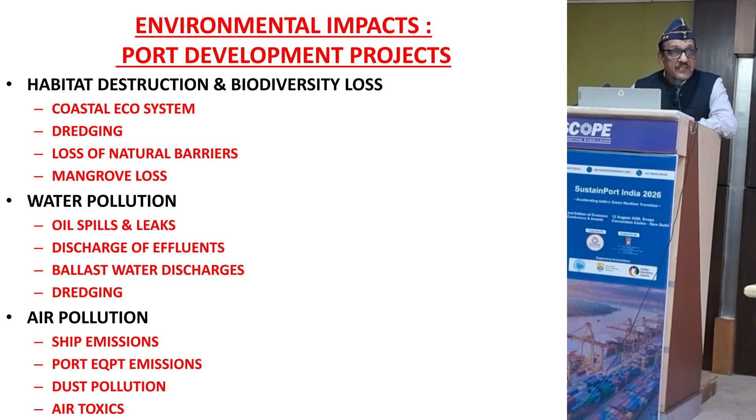Now, this technology today is coming very useful for the ports also, for port projects. Most of the authors have already covered what the pollutions are. We are mostly talking about air pollution, but there is also noise pollution and additional pollutions. I will concentrate my presentation only on air pollution, for which we have got the solution.

Coming to the concept of this Bunkerman technology, gentlemen, pollution is increasing continuously in all big cities like Delhi, Bombay, Calcutta. The temperature is increasing; the global 1.5 degree limit has already been crossed. We are going to cross very soon even 2 degrees centigrade.

And as Madam said this morning, DG TERI said that whatever we expected - that global temperature will rise - it is rising much faster than that. So this is a fact. I will show you some of the data.

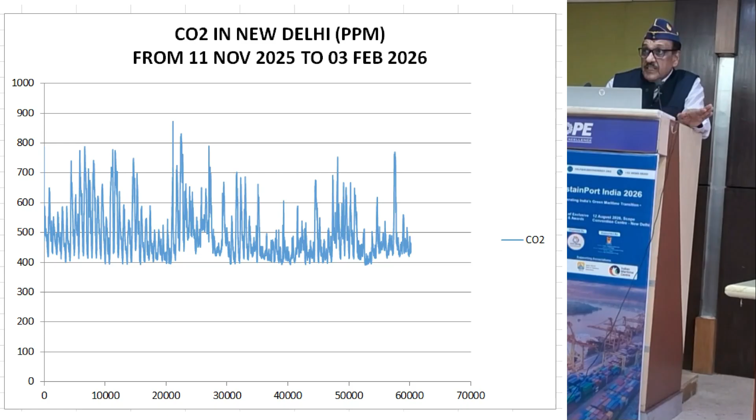Gentlemen, this is Delhi. World average CO2 was 425 till last year; this year it has been reported at 430 ppm world average. But in Delhi it is crossing 600, 700, 800, and even in some areas, near AIIMS Hospital and Safdarjung Hospital, we recorded last year that it crossed 1000 ppm CO2 content in the environment outside, which is causing a great problem.

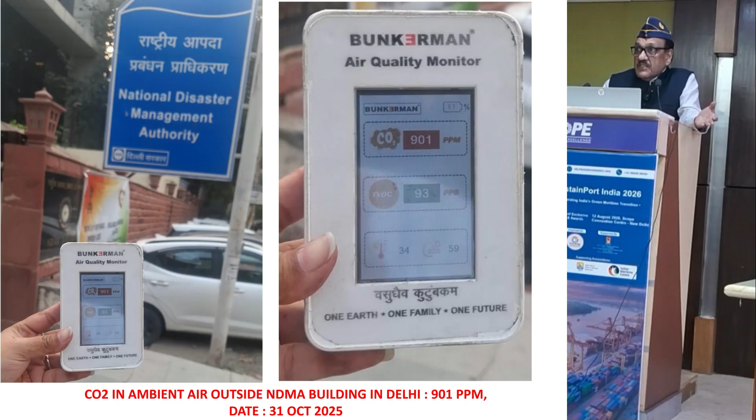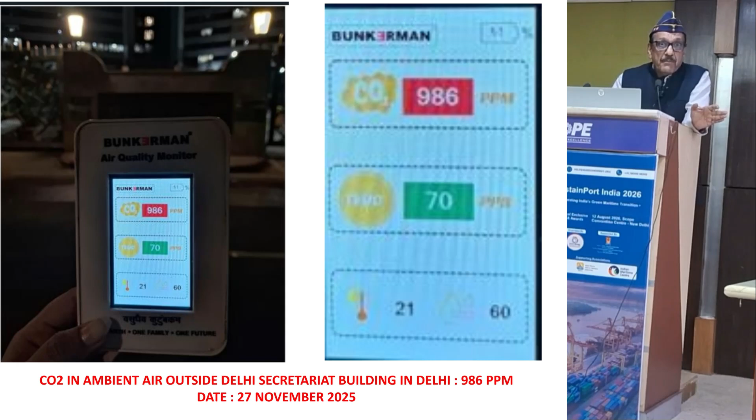This reading was taken in front of AIIMS Hospital, Safdarjung Hospital: 1052 ppm, noted in October 2025. Next to our National Disaster Management Authority, more than 900 ppm was recorded. In the Delhi Secretariat, 731 ppm, and at night it crossed 986. Now, gentlemen, the upper limit given for all air-conditioned buildings is that it should not cross 800 or 1000 ppm. I will come to why our air-conditioned buildings are failing today to ensure indoor air quality and temperature.

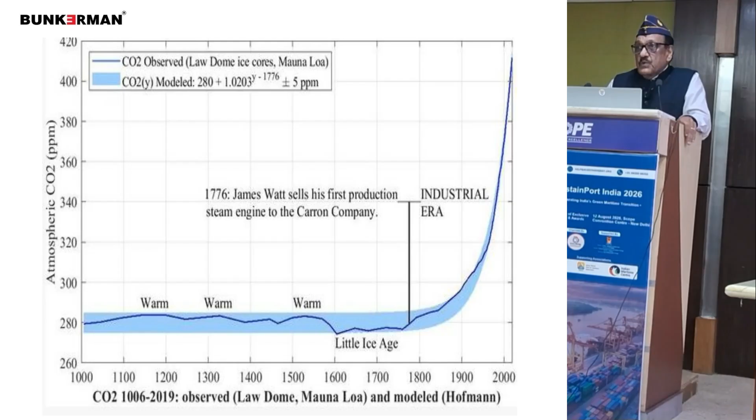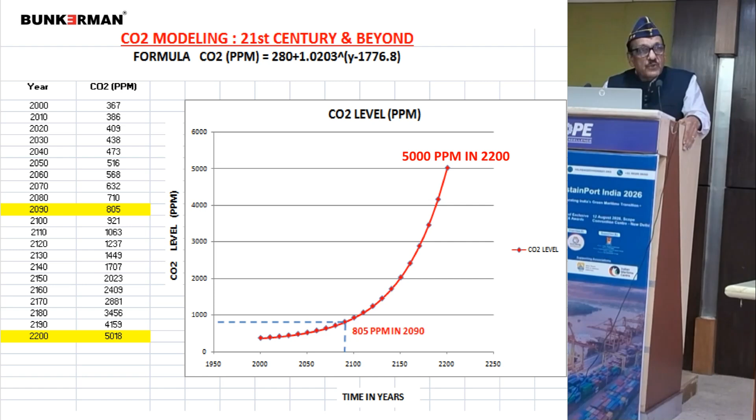Now this is the equation. If we extrapolate this, it means that if we don't do anything to arrest this rising trend of CO2, then by year 2090 this will cross the safe limit of 800 ppm, and by 2200 it will cross a very dangerous level of 5000 ppm.

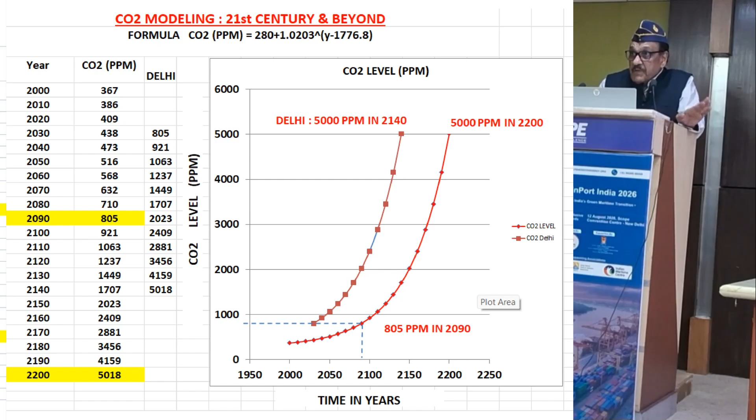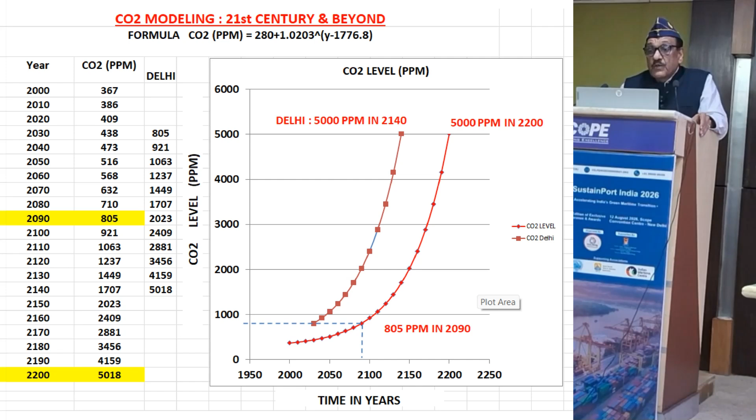But in Delhi, this is the graph. By this trend, 800 ppm limit should have come in Delhi by 2090. But in Delhi, it is already crossing 1000 ppm. So the year 2090 has already arrived in Delhi in 2026, in other words. And therefore, by 2140, it will cross a figure of 5000 ppm, gentlemen.

And at 5000 ppm, what will happen? No human being will be able to survive on this planet. It means only the next 2 generations - we will live comfortably, probably our next generation will also live - but the generation after that, God is only responsible for whether they will be able to survive on this earth or not. And that is why the whole world is worried now.

This was the dream of Dr. APJ Abdul Kalam, that let us make the planet livable. Otherwise, this planet is no more livable if we don't arrest this rising trend of CO2.

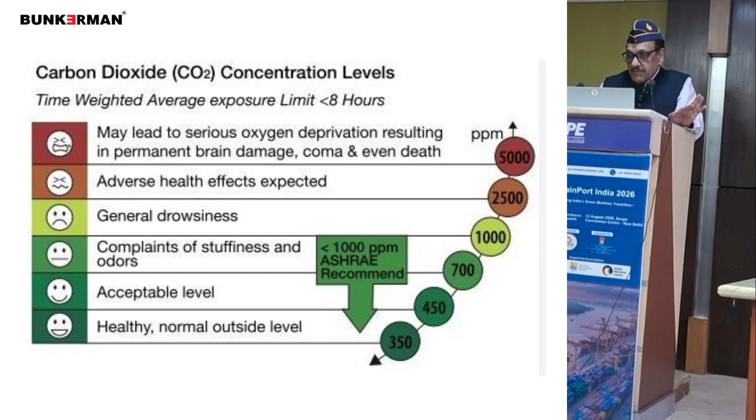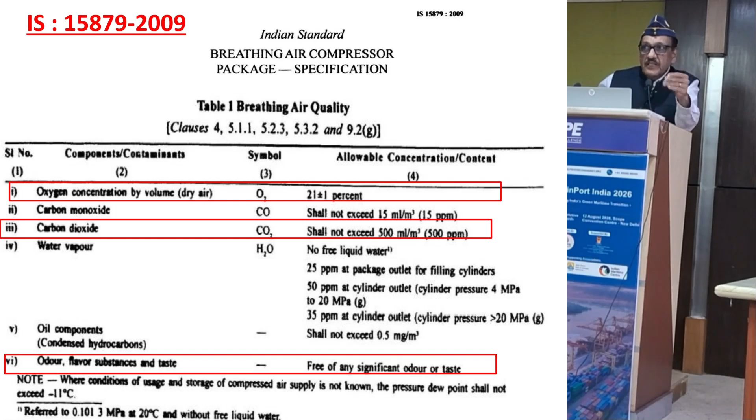There is an Indian standard published by us, IS 15879, published in 2009 by Bureau of Indian Standards. This says that safe limit of carbon dioxide in air for breathing should not exceed 500 parts per million. But today, even in this hall, when we came in the morning, outside CO2 content was 600. Now it has already crossed 900 ppm, and there is hardly any occupancy.

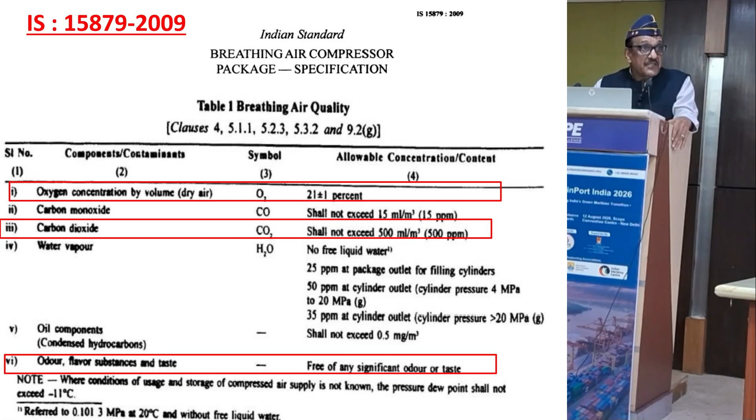I have got the records in India. The CO2 level in all indoor halls like this rises beyond 1000, which is specified by ASHRAE. I will show you some of the figures.

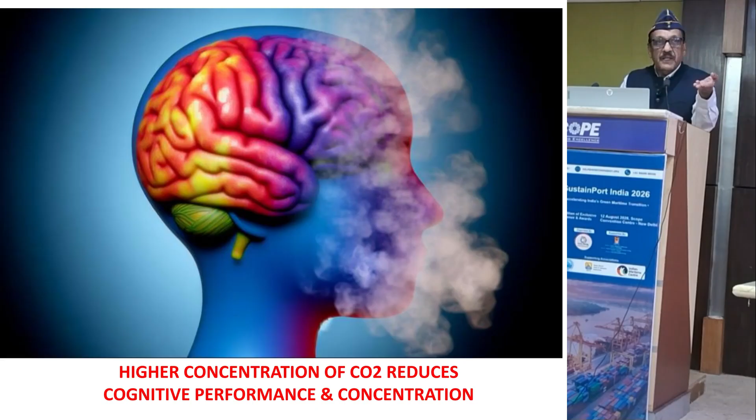Another effect of this rising CO2: if CO2 level crosses above 900, gentlemen, there is 15% reduction in our cognitive capacity. You must be feeling sleepy, you must be yawning in the afternoon because the CO2 level has risen from 600 ppm to about 900 or 1000 ppm. And if this level rises beyond 1400 ppm, these are studies by Harvard University and other universities, your cognitive skill gets reduced by more than 50%.

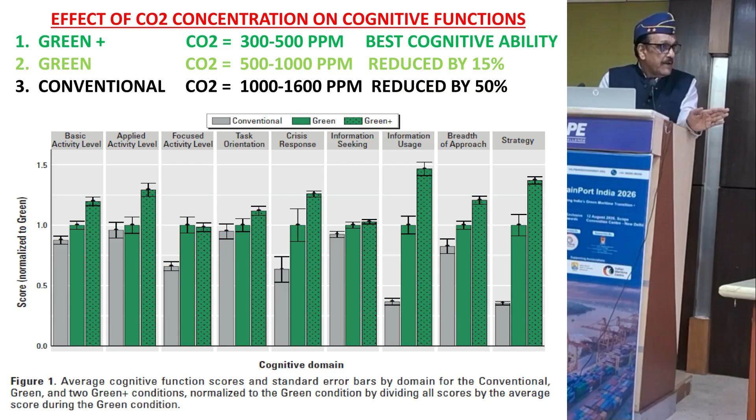So it means all of our officers working in air-conditioned offices where CO2 level exceeds 1500 ppm are using only 50% of our mental faculty. All our students studying in schools where ventilation is not proper are working with only 50% cognitive skill capacity.

This is a fact. These are the records from one of the schools. This is a very good university in NCR, where in the classroom the CO2 level was found to be more than 2300 ppm. And mind it, this is a green building.

In India, we certify buildings as green buildings with the map when the planning is done, and then we forget about ventilation. This building has a beautiful campus, all green building, green area, lot of greenery, lots of trees planted there. But what foolishness we have done - when classrooms were designed, they had no proper ventilation with ventilators, doors and windows.

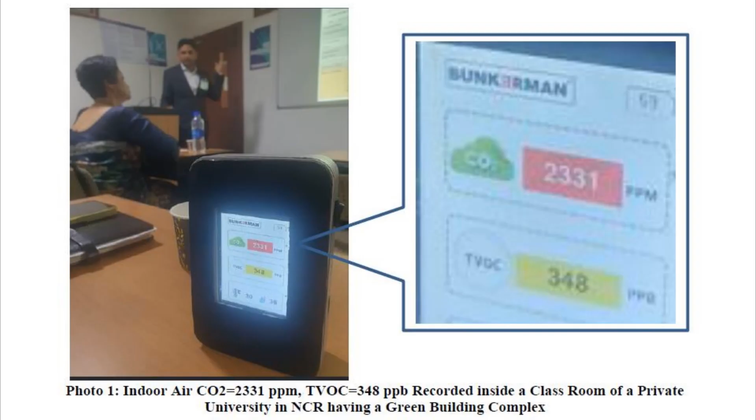Now students complain that it feels hot, so they closed all ventilation and put 2 air conditioners inside - no ventilation. With the result, gentlemen, CO2 content goes to 2300 ppm. Now you can imagine, our students are studying, sitting inside a gas chamber basically. And that's why their health is being spoiled, that's why their cognitive skills are getting affected. This is a bitter truth.

See another level - this is a 5-star hotel where the Bharat Summit, Rising Bharat Summit was held. Our ministers, Prime Minister, Home Minister were addressing this and talking on this very topic. And the CO2 content rose to 1300, 1400. In fact, by the time they finished, it rose to more than 1800 ppm.

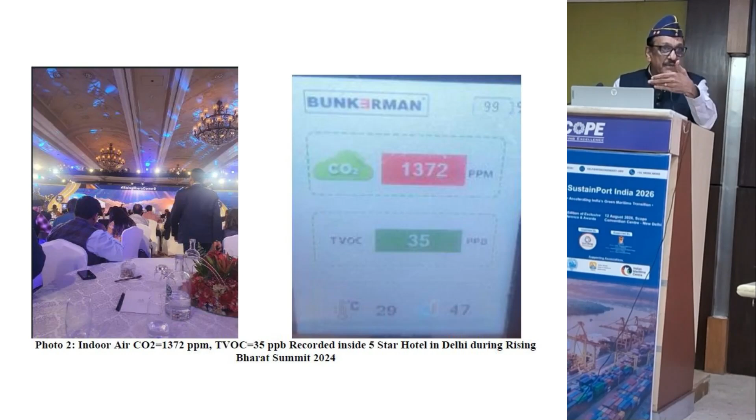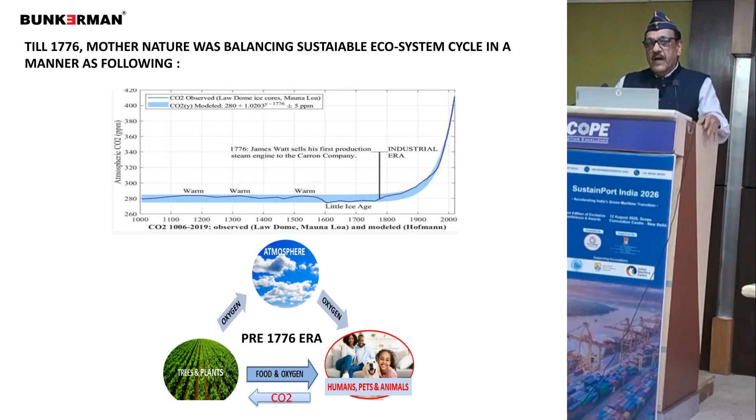So what was happening, gentlemen? Earlier, on the left, there was a sustainable cycle, this triangle which you see. Prior to the industrial era, prior to year 1776, whatever CO2 was being generated on the earth by any activity, our natural system of trees and plants were able to absorb it. And in return, they were giving us oxygen and food. So this was a sustainable cycle existing on the earth for thousands and thousands of years.

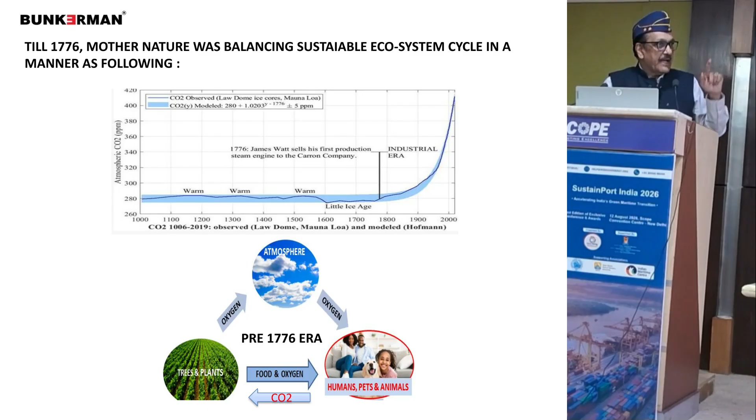But what happened after that? We constructed industries, we increased the number of vehicles and traffic, we went for air conditioning. Everywhere now there is air conditioning - in our house, in your office, in your vehicle, in the car, in the bus stand, everywhere. Because of this, we generated so much carbon emission that this sustainable triangle on top failed. And on top of that, we started cutting trees - deforestation started. So this cycle got disturbed.

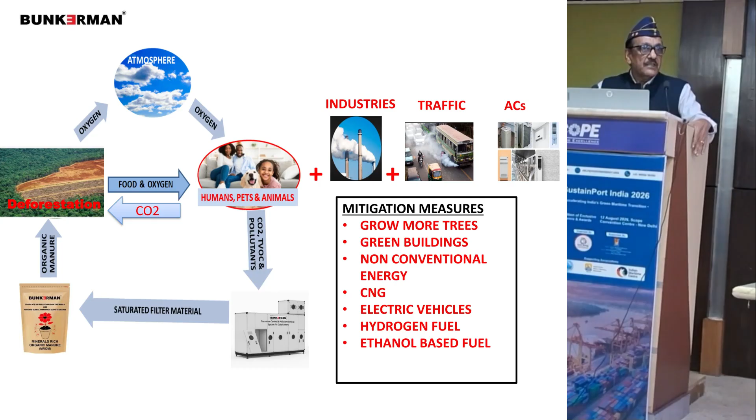Government is making all these efforts - grow more trees, green buildings, non-conventional energy, CNG, electric vehicles, hydrogen fuel, ethanol, methanol, all the things you have been hearing since morning. Everybody is making a dedicated effort to reduce emission. But why is this rising graph not reducing?

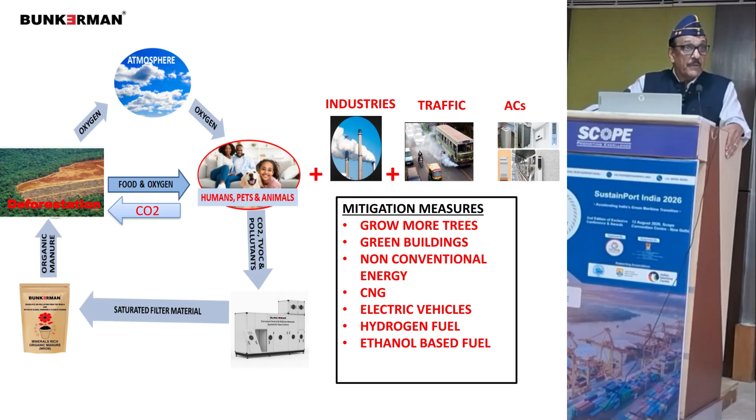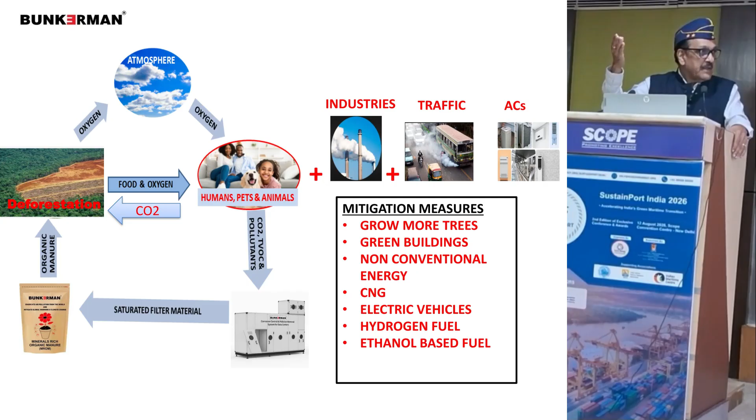We are claiming we fixed a target by 2070 to become net zero. Now we are saying by 2047 we become net zero. Some people are even talking of 2030. So if we will become net zero by 2030 or 2047, why is this graph still rising? Why is global warming not stopping? Why is temperature still rising? There is somewhere a mismatch.

The situation has come to this extent that we have created so much pollution, so much carbon in the existing air, that unless we capture it directly, the solution is not going to be there. So this technology of direct air capture or direct carbon capture has to be adopted by compulsion in India if you want to survive on this planet.

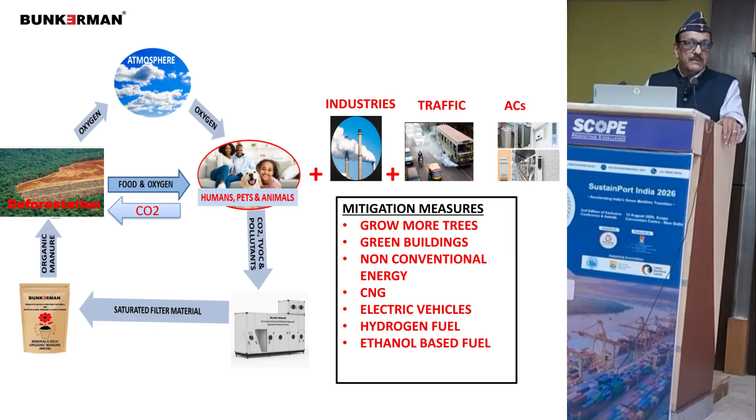So what this technology does, gentlemen, is we have invented a system in which we capture carbon dioxide, carbon monoxide, sulfur dioxide, all types of pollutant gases from the atmosphere, and we don't leave it back to the atmosphere again. These are captured into our filters called Bunkerman filters.

The filters last for 1 year, 12 months. They keep absorbing all these gases. After 1 year, we replace the old filters with new filters, and this new filter material gets enriched by this pollution. Carbon dioxide is converted into a stable compound, carbonates, in our filters.

Sulfur dioxide is converted to sulfates. Nitrogen dioxide is converted into nitrates. And all these things, carbonates, sulfates, nitrates, are nutrients for our trees and plants.

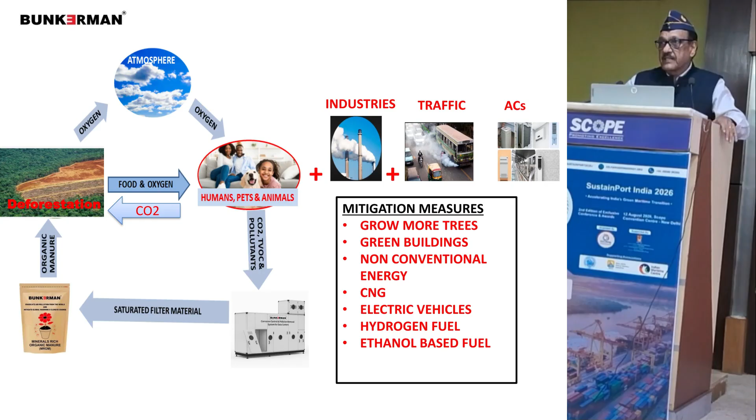So from this used, saturated filter material, we make mineral-rich organic manure in our plant, which is about 100 kilometers from here in my native village. This manure is then issued to the farmers, and farmers use it in farming.

So, in a way, pollution is moving from air to soil, and it is providing the nutritional value to trees and plants. There will be more production of food, more oxygen will be produced, and therefore the sustainable cycle of the triangle which existed earlier will be restored by this.

This is what is our aim. It is a very big aim, gentlemen. You may not believe it, but we have proved it.

This has been successful. This technology of direct carbon capture, gentlemen, I have been using in India for the past 25 years, but only in top secret projects, underground nuclear bunkers. This is, in fact, still top secret. There are about 45 systems in these nuclear bunkers which are used. Out of them, there is one system, the indoor air quality management system.

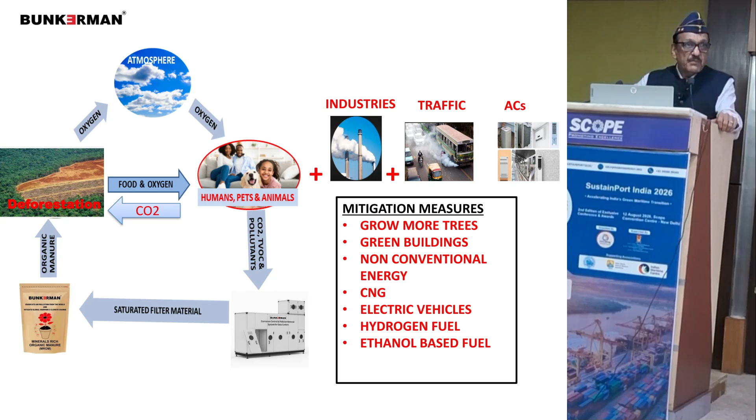After suffering in Corona, I decided that this technology, developed by me in India and totally indigenous, why not use it for my common public, for civil use? So with great difficulty, gentlemen, I have taken permission from the government to use this technology in civil use.

This is the organic manure made out of pollution existing in the air. Now, this is the concept you have to understand, gentlemen. Everybody talks about pollution coming from industry or from the exhaust of a vehicle. Nobody believes that man itself is a pollution creating machine.

Gentlemen, in one inhalation-exhalation, I multiply the contents of CO2 in the atmosphere by a factor of 146. This is a fact. I can experiment it and show it to you today if you have got time.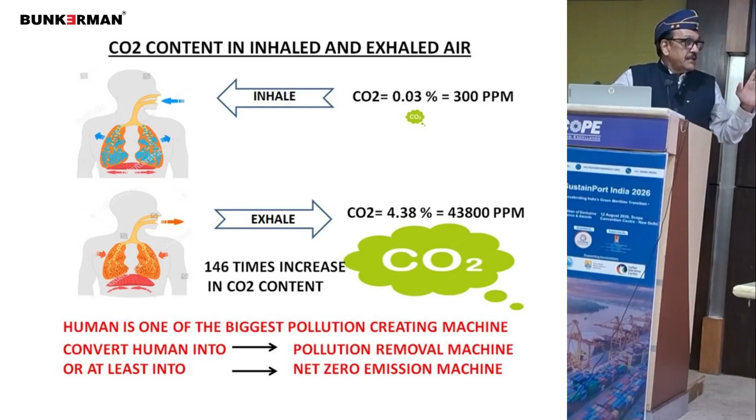But a tree - how much does one tree absorb in a year? A grown up tree of 10 to 15 years of age absorbs only 20 to 25 kg of carbon dioxide in a year. So each one of us needs about 17 trees per person.

Other livestock, animals, birds, they also breathe. Even a lizard hidden somewhere here is consuming oxygen and giving out CO2 in this environment. So 15% is the CO2 emission by respiration from livestock.

So in my technology, in my solution, I am thinking of this first, because this is what is affecting your immediate health. Whatever you are exhaling out, I am inhaling. This is happening almost in our villages, in our homes, in our offices also.

So gentlemen, we need 17 trees. Now coming to trees, see the interesting thing - we need 17 trees in India to absorb the CO2 which we are exhaling out by respiration. We need 20 trees for our livestock.

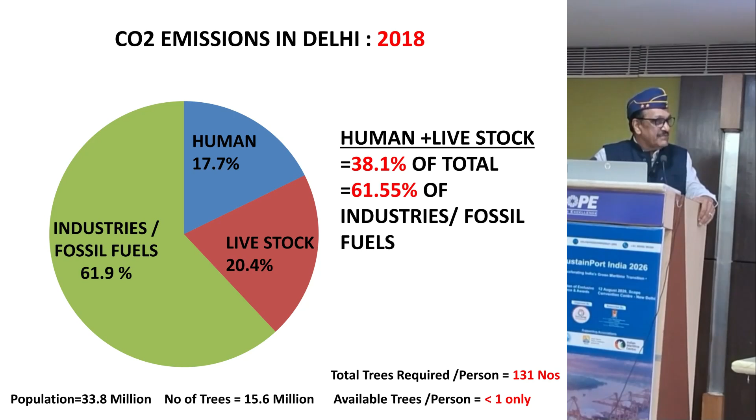So now you can imagine how much greenery you can develop in Delhi and reverse this climate change. No, this is the reason why Delhi's pollution problem is not coming down. And see the world scenario, gentlemen.

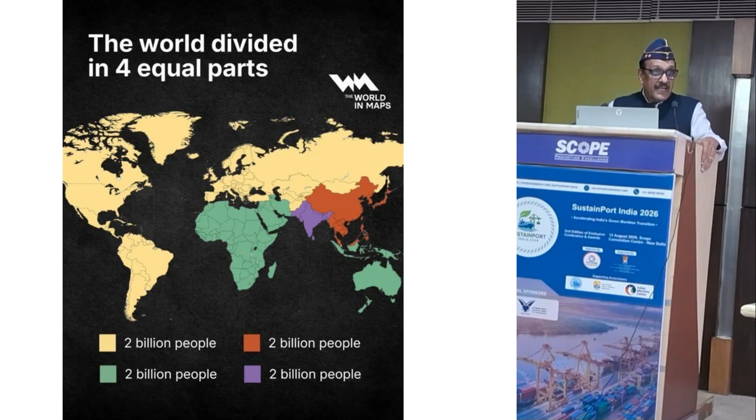And that is the reason why we say Delhi is the worst in the world in terms of pollution. Why is Delhi's status the worst in pollution? Delhi is like that because most of the concentration of population is in this region of the world.

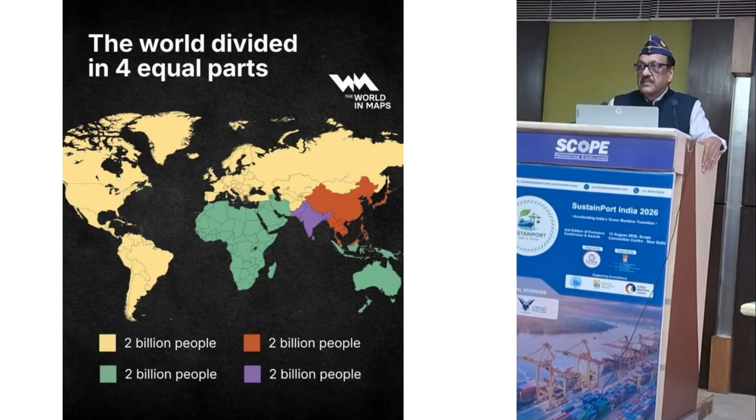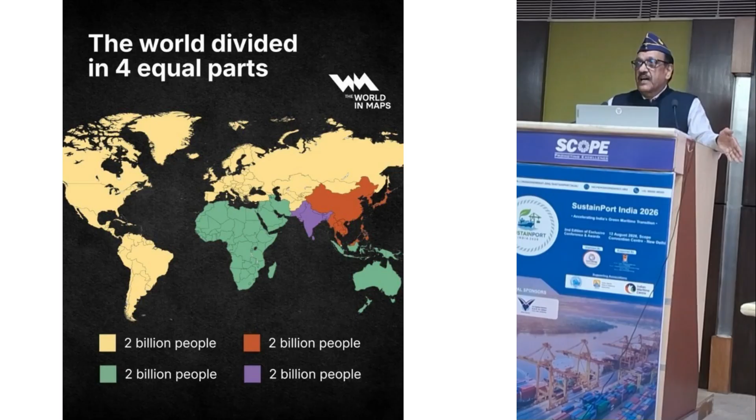जहाँ ज़्यादा पॉपुलेशन है, वहाँ ट्री कवर पहले से ही बहुत कम है, ऑलमोस्ट ज़ीरो। तो क्या ट्री प्लांटेशन इसमें मदद कर पाएगा? जेंटलमैन, मैं भी ज़्यादा पेड़ लगाने के पक्ष में हूँ - ऑक्सीजन पेड़ों से ही मिलेगी, लेकिन इसकी एक कैलकुलेशन है, एक साइंटिफिक तरीका है, उसको फॉलो करना पड़ेगा। तो क्या अब आप समझ गए कि इंडिया में क्यों प्रॉब्लम है?

Now what is happening, gentlemen, in air conditioned buildings? In air conditioned buildings, there is a code which is followed, and this code is by ASHRAE, American Society of Heating, Refrigerating and Air-Conditioning Engineers. That ASHRAE standards have been made based on American conditions.

In America, outdoor CO2 content in air is still 300-350 ppm, जो इंडिया में 800-900 हो गया है। और इसीलिए जो बिल्डिंग डिजाइन करी है इंडिया में, आज भी हमारे डिजाइनर वही स्टैंडर्ड लेके फॉलो करते हैं। उन्होंने एक मिनिमम स्टैंडर्ड दिया है कि मिनिमम इतना वेंटिलेशन होना चाहिए, वो हम फॉलो करते हैं। विद रिज़ल्ट जेंटलमैन, ऑल आवर एयर कंडीशन बिल्डिंग्स आर फेलिंग टू मेंटेन द इंडोर एयर क्वालिटी एंड इवन टेम्परेचर।

आई हैव गॉट कंप्लेंट्स फ्रॉम मैनी बिल्डिंग्स इन नोएडा। उनका टेम्परेचर 29 डिग्री से नीचे नहीं आ रहा है। 29 डिग्री से नीचे लाते हैं टेम्परेचर तो CO2 लेवल बढ़ जाता है। गुड़गांव में एक अच्छी प्रेस्टिजियस बिल्डिंग ऑफ ए कंपनी विच इज प्लेटिनम सर्टिफाइड, ग्रीन सर्टिफाइड, उसमें CO2 लेवल हैज बीन फाउंड एक्सीडिंग 3000 ppm। People are vacating that building now, they are shifting to some other location. So this problem has already started.

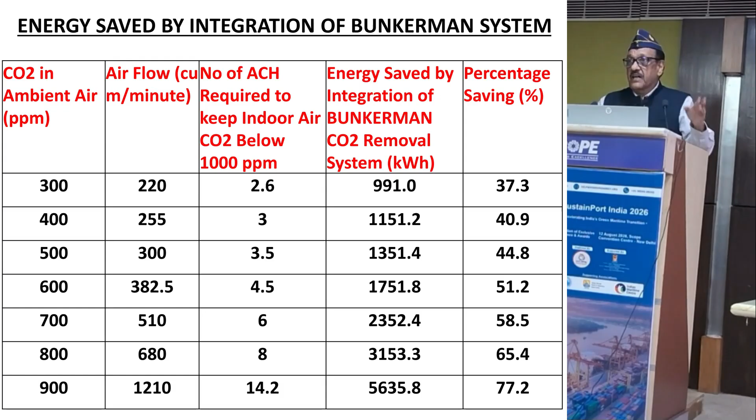और मजेदार बात क्या है, what these building owners are doing - जब इनको पता है कि ये फेल हो रहा है, what they are doing, they are increasing the capacity of air conditioning plant। जहाँ 200 टन का प्लांट है वो 300 टन का कर रहे हैं। इससे प्रॉब्लम और बढ़ेगी।

क्यों बढ़ेगी? क्योंकि इसमें एक एयर चेंज का सिस्टम है जेंटलमैन। आप समझिए, इस हॉल में आप बैठे हुए हैं, अब ये 1000 ppm हो जाएगा CO2। कोड कहता है 1000 से ऊपर नहीं होना चाहिए। तो क्या करते हैं, बाहर की हवा ऐड करते हैं, दिस इज कॉल्ड एयर चेंज पर आवर। और बाहर का टेम्परेचर इंडिया में अभी कितना है? 40-45 है आज के डेट में, 35-40।

अंदर हमको 20-22 चाहिए। तो ये सारी हवा बाहर की अंदर लाते हैं हम, जिसको ठंडा करना पड़ता है। गर्मियों में, सर्दियों में उल्टा हो रहा है। सर्दियों में बाहर का टेम्परेचर 5-10 डिग्री सेंटीग्रेड होता है, मुझे 22 डिग्री चाहिए अंदर, वो हीटिंग करना पड़ता है। तो ये जो एनर्जी वेस्ट होती है, इसको किस वजह से कर रहे हैं?

क्यों कि CO2 का कंटेंट 1000 ppm से ना जाए। एंड व्हाट इज 1000 ppm इज 0.1%। और हवा में बेसिकली 3 गैसेज हैं। एक है नाइट्रोजन जो न्यूट्रल गैस है जो 78-79% है। बाकी है ऑक्सीजन जो अच्छी गैस है, 21% ऑलरेडी है। इसको 19 से 18% आने में टाइम लगता है, 10-12 घंटे लगते हैं कम से कम।

लेकिन CO2 बहुत जल्दी बढ़ जाता है। तो इस 0.1% CO2 से घबरा के हम जो अच्छी एयर हमने ठंडी की है, इसको हम बाहर फेंकते हैं और बाहर की गर्म हवा को अंदर लेते हैं। दिस इज कॉल्ड एयर चेंज पर आवर इन HVAC डिजाइन। दुनिया में ऐसे ही सब AC डिजाइन हो रहे हैं।

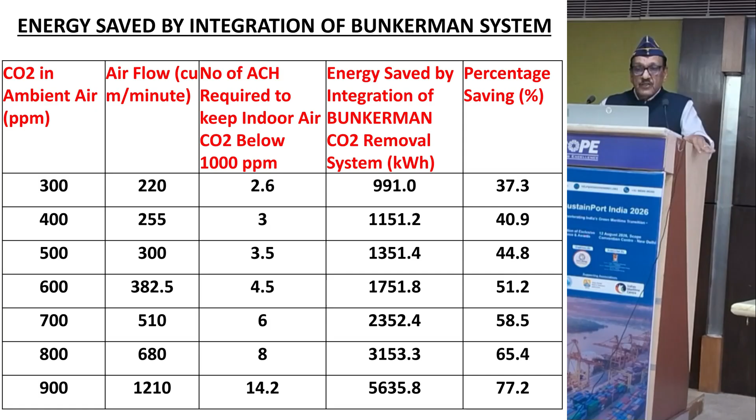तो दिस विल क्रिएट फर्दर प्रॉब्लम। सो माई कंक्लूजन इज दैट मोस्ट ऑफ दीज एयर कंडीशन बिल्डिंग्स, जितने भी 5 स्टार होटल हैं और जितने मल्टी स्पेशलिटी हॉस्पिटल्स हैं इन दिल्ली एंड NCR, आई हैव मेजर्ड इट। वहाँ जाके CO2 कंटेंट और यहाँ पर, यहाँ से 100 ppm ज़्यादा पाया जाता है वहाँ।

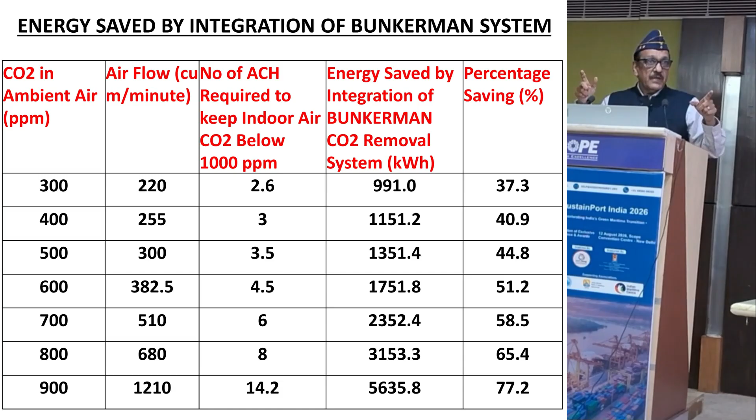सारे 5 स्टार होटल, ऑल मल्टी स्पेशलिटी हॉस्पिटल, वो पॉल्यूशंस को पंप आउट कर रहे हैं एनवायरनमेंट में। ये कंडीशन है हॉस्पिटल्स की। कुछ हमारे पास आए कि साहब हमारा ऑन्कोलॉजी डिपार्टमेंट है नीचे, जो रेडिएशन निकलता है उसको क्लीन करने का कोई सिस्टम नहीं है इंडिया में, उसको एयर चेंज से पंप आउट कर देते हैं बाहर। 10, 12, 15, 20 एयर चेंजेस यूज होते हैं हॉस्पिटल्स में, 1 घंटे में 20 बार, और सारा पोल्यूशन बाहर जाता है।

अब आप इमेजिन कीजिए, इनसे पूछते हैं क्या करते हैं, तो कहते हैं साहब हम अपनी बिल्डिंग के टॉप पे 10 फीट ऊपर छोड़ देते हैं। हॉस्पिटल 4-5 स्टोरी का है, लेकिन इसके पीछे बैकग्राउंड में कितनी मल्टी स्टोरी बिल्डिंग्स हैं, 15, 20, 25 स्टोरी।

पुराने लोग सोचेंगे, नोएडा बसाया गया था किस लिए? दिल्ली में पॉपुलेशन का लोड कम हो। गुड़गांव बसाया गया कि दिल्ली में पॉपुलेशन का लोड कम हो। लेकिन अब नोएडा, गुड़गांव, ग्रेटर नोएडा सब सैचुरेट हो चुके हैं, वहाँ पर भी मल्टी स्टोरी बिल्डिंग आ गई है।

अब दोबारा एक ट्रेंड शुरू हुआ है दिल्ली में मल्टी स्टोरी बढ़ने का, और जेंटलमैन मल्टी स्टोरी बढ़ेंगी तो कंसंट्रेशन पॉपुलेशन होगा। इससे रिलेटेड सारी एक्टिविटी CO2 एमिशन की हैं, क्योंकि इनकी गाड़ियाँ भी होंगी, इनके चूल्हे भी जलेंगे, सारा काम CO2 एमिशन ही कर रहे हैं।

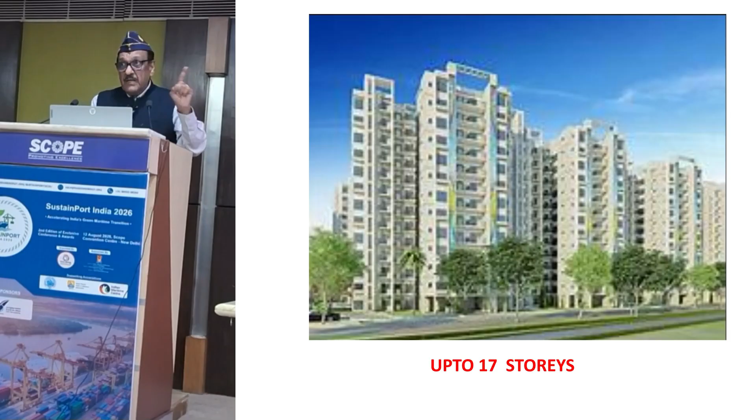तो गवर्नमेंट कोशिश बहुत कर रही है, लेकिन जितनी आप कोशिश कर रहे हैं नेट जीरो होने की, वो नलीफाई हो रही है इससे, क्योंकि जो इफेक्ट यूज कर रहे हैं उनका इफेक्ट पड़ता है 5%, 10%, लेकिन पॉपुलेशन बढ़ जाती है 25%, 30%। दिस इज द रीजन, बिना डायरेक्ट कार्बन कैप्चर के प्रॉब्लम सोल्व नहीं होने वाली है, आई एम 100% श्योर।

This is my conclusion. I have recommended to the government that all 5-star hotels and multi-specialty hospitals are pumping out pollution into the outdoor environment.

जैसे स्प्लिट एयर कंडीशनर बाहर गर्मी छोड़ता है, अंदर की गर्मी आप बाहर छोड़ रहे हैं, उसी तरह अंदर का सारा पोल्यूशन बाहर छोड़ रहे हैं। This is a bitter fact, which is causing health hazard for the public. It may be sustainable business for hospitals and 5-star hotels, but it is a destruction model for public health.

And therefore, reduction in air change per hour by using Bunkerman technology of direct carbon capture at a negative cost reduces this problem. Gentlemen, direct carbon capture सब कंट्री यूज कर रही हैं, लेकिन इसकी इंटरनेशनल कॉस्ट मार्केट में अभी भी $300 से $600 पर टन है।

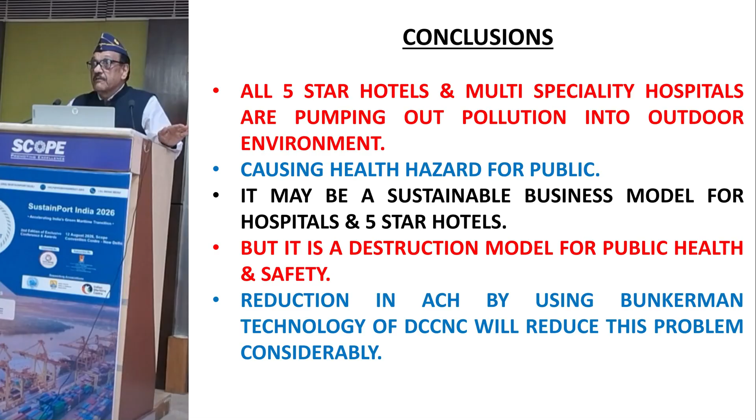You will be surprised with this Bunkerman technology, which is totally indigenous. We have not only brought this cost to zero, it is minus $160 पर टन। अभी दिखाऊंगा आपको इसके केसेस, ये टेक्नोलॉजी कमा के दे रही है आपको।

सक्सेसफुल केस स्टडीज। पहला ये सिस्टम हमने लगाया 2 साल पहले गुवाहाटी की रिफाइनरी में। उनके यहाँ एक डाटा सेंटर था जिसमें 9000 क्यूबिक मीटर ऑफ स्पेस था, 85 मीटर बाई 25 मीटर का। इस डाटा सेंटर में कोरोजन हो रहा था, इनका डाटा करप्ट हो रहा था।

जो इलेक्ट्रॉनिक पार्ट्स हैं वो कोरोड हो जाते हैं। क्यों? क्योंकि हवा में जनरली कार्बन डाइऑक्साइड, सॉक्स नॉक्स तो होते ही हैं, इनके अलावा बड़ी टॉक्सिक गैसेज होती हैं रिफाइनरीज में जो निकलती हैं, वो गैसेज अंदर जा रहे थे।

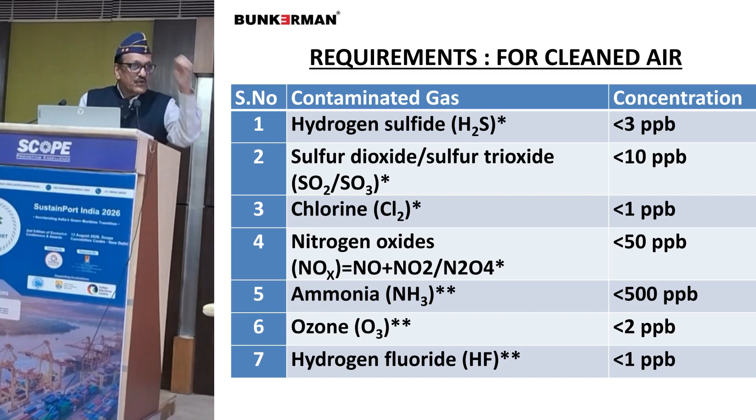ये 2 से 3 एयर चेंज पर आवर लेते थे। हर घंटे में इतनी बार बाहर का पोल्यूशन अंदर आ रहा था, अंदर का क्लीन कहाँ तक करोगे? नहीं हो सकता। हमने क्या किया, हमने इसमें सिस्टम लगाया अपना बंकरमैन टेक्नोलॉजी का।

ये सिस्टम लगाया इनके एसी प्लांट में, 4 मीटर बाई 1.5 मीटर का। और जब से हमने सिस्टम लगाया, दे आर यूजिंग ओनली 1 एयर चेंज इन 24 आवर्स। जहाँ 24 घंटे में 96 एयर चेंज ले रहे थे, वी हैव सेव्ड 95 एयर चेंजेस। तो 24 घंटे में 1 एयर चेंज लेते हैं।

वो भी किस लिए? क्योंकि ऑक्सीजन की जरूरत होती है। वो भी समझाऊंगा क्यों 1 एयर चेंज जरूरी है। जैसे इस हॉल में हमारी रिकमेंडेशन है कि जब मॉर्निंग में खोलते हैं तब बाहर 600-500 ppm है, तो अंदर का भी 500-600 कर लो।

नहीं तो जब खोलते हैं तब भी 1000-1200 मिलता है ज़्यादातर हॉल्स में। उसके बाद बंद कर दो। जो CO2 जनरेट हो रहा है उसको अंदर ही एब्जॉर्व करो नई सिस्टम के साथ। और आपको 10, 12, 15, 18 घंटे तक कोई जरूरत नहीं है फ्रेश हवा लेने की। उसके बाद अगले दिन फिर फ्रेश हवा ले लो। तो वी आर रिकमेंडिंग ओनली 1 फ्रेश एयर चेंज इन 24 आवर्स in building, and this is working fantastically now.

Practically it has been proved. I am using this technology for last many years practically on ground.

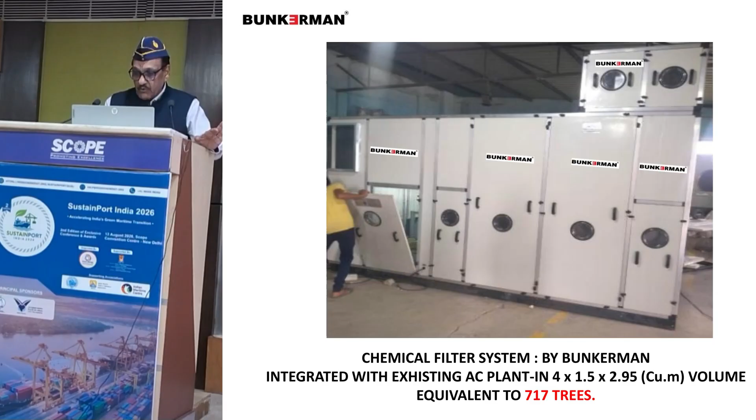ये सिस्टम है, एक ब्लोअर लगता है, ये बंकर, ये फिल्टर है हमारे छोटे से. दिस फिल्टर इज जस्ट बाय 1 फीट बाय 1 फीट साइज, 4 इंच थिक, और ये लाइक ए ब्रिक जुड़ जाते हैं. और ये फिल्टर जेंटलमैन, 12 महीने की हमारी गारंटी है रिफाइनरी में, क्योंकि पहला पायलट प्रोजेक्ट है.

हमने इसको 18 महीने चलाया. 18 महीने में फिल्टर सैचुरेट नहीं हुए हैं. लेकिन हम चाहते हैं कि ये 12 महीने में इनको वापस लें, क्योंकि हमने इसकी जो फिल्टर मटेरियल एनरिच हुआ है उसकी ऑर्गेनिक मैन्योर बनानी है. हमको इसको सस्टेनेबल साइकिल में डालना है. तो इसलिए हम 1 साल की गारंटी दे रहे हैं. 1 साल के बाद नए फिल्टर हम रिप्लेस कर देते हैं, पुराने फिल्टर वापस ले लेते हैं.

और इस बिल्डिंग में जेंटलमैन सबसे पहला इनका रिएक्शन ये था कि हमारी कोरोजन की प्रॉब्लम है, क्योंकि कोरोजन होता है इनका, G1 कंडीशन एक होती है, G1 कंडीशन मेंटेन करनी पड़ती है, वो नहीं हो रही थी इनकी. तो फर्स्ट रिएक्शन वाज, मैंने कहा भाई हमारी CO2 भी हम एब्जॉर्ब करते हैं. हाँ, CO2 की कोई प्रॉब्लम नहीं है हमें, इग्नोरेंस. लेकिन हमने CO2 जबरदस्ती डाला इसमें.

जब हमने डाला जेंटलमैन, CO2 अभी उनका 500-600 ppm से आगे नहीं जा रहा है. पीपल वर्किंग दे आर वेरी हैप्पी. उनकी फीडबैक है साहब पहले तो यहाँ दम घुटता था, अभी तो वी आर जन्नत में रह रहे हैं. हम रिफाइनरी के बाहर जाते हैं तो हमें पोल्यूशन महसूस होता है, क्योंकि बाहर की हवा में वो बदबू आती है, लेकिन अंदर रहें.

इसमें 3 चिलर थे, 80 टन कैपेसिटी के. 2 चलते थे, एक स्टैंड बाई रहता था. जब से हमने अपना सिस्टम लगाया एंड 1 एयर चेंज ले रहे हैं 24 घंटे में, सिर्फ 1 चिलर चल रहा है जेंटलमैन. तो 50% इनकी पावर सेविंग है.

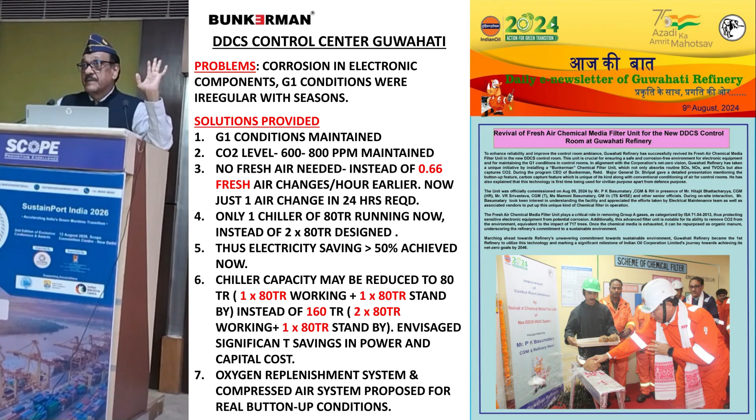और ये इसकी स्टैटिस्टिक, एजेंट में 128 फिल्टर्स आर देयर इन दिस स्मॉल सिस्टम. और ये 2 लाख रुपये पर मंथ की बिजली का बिल बचा रही है. और इतनी CO2 एब्जॉर्व कर रही है जो 700 पेड़ों के बराबर है. उसके अलावा जो बिजली की बचत हो रही है उसकी वजह से 7872 पेड़ों के बराबर ये कार्बन क्रेडिट क्लेम कर रहे हैं. टोटल कार्बन क्रेडिट्स दे आर क्लेमिंग इक्वलेंट टू 8597 ट्रीज इक्वलेंट.

ये जो आप समझ सकते हैं, कार्बन क्रेडिट में काम कर रहे हैं किस तरह से कैलकुलेट होती हैं. सो टोटल कार्बन एमिशन विच इज रिड्यूस्ड इज 215 टन. तो 215 कार्बन क्रेडिट पॉइंट्स दे आर अर्निंग विद दिस प्रोजेक्ट. विद द रिजल्ट, इन्होंने 3.87 लाख के कार्बन क्रेडिट अर्न कर लिए हैं एक साल में.

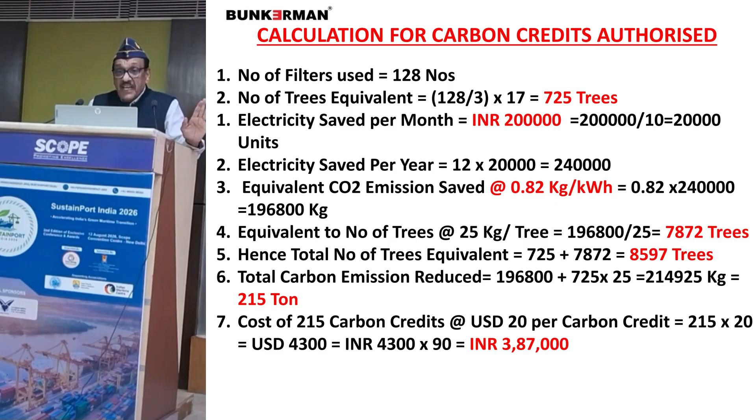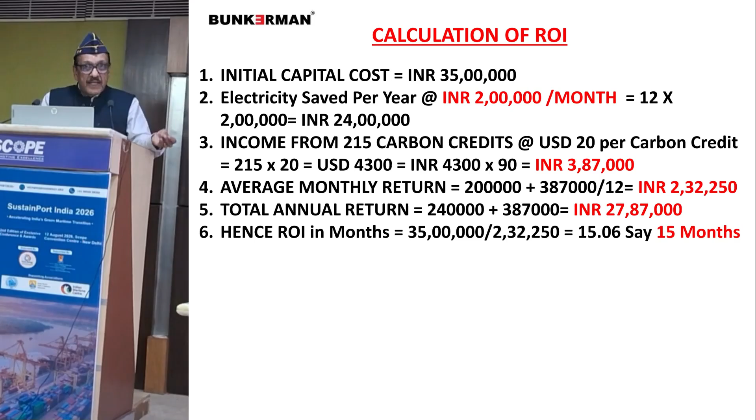और ये स्टैटिस्टिक है जिनमें 35 लाख रुपए में ये पायलट प्रोजेक्ट लगा है और इनके 35 लाख रुपए 15 महीने में टोटली रिकवर हो गए हैं. एंड नाउ दिस प्रोजेक्ट इज अर्निंग देम 2 लाख रुपीज पर मंथ एज पावर सेविंग. सो दैट्स वाई दिस इज ए डायरेक्ट कार्बन कैप्चर एट नेगेटिव कॉस्ट. नाउ आई विल कम टू द पोर्ट्स.

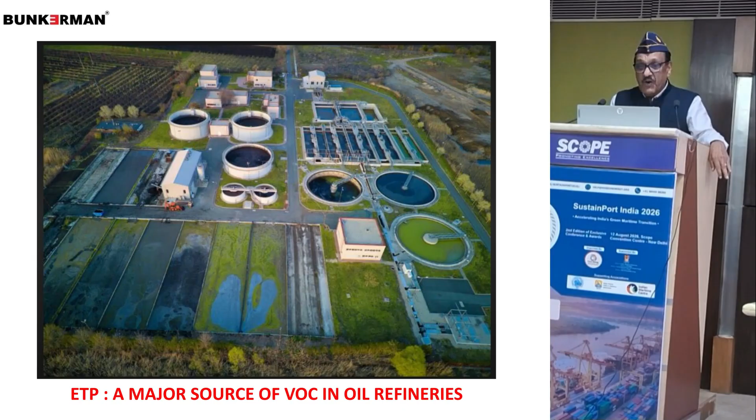एक दूसरी केस स्टडी है रिफाइनरी में, उसी में इनके यहाँ 15 केमिकल लेबोरेटरी हैं, उन सब में ये सिस्टम लगा है. दिस इज आल्सो हैव बीन सक्सेसफुल. इसमें डक्टेबल यूनिट लगाई है. एक ईटीपी की प्रॉब्लम है, एफ्लुएंट ट्रीटमेंट प्लांट, ये पोर्ट्स में भी होती है. सीवेज ट्रीटमेंट प्लांट, एफ्लुएंट ट्रीटमेंट प्लांट की रिक्वायरमेंट वहाँ भी होगी, पोर्ट्स में भी. तो इनमें फाउल गैसेज निकलती थी, तो इनके लिए हमने सिस्टम डिजाइन करके दिया है. और दिस वाज देयर रिक्वायरमेंट कि 90% वीओसी एब्जॉर्ब होने चाहिए.

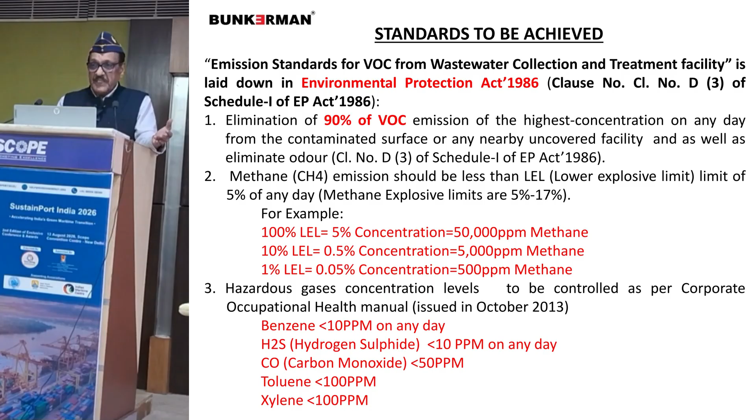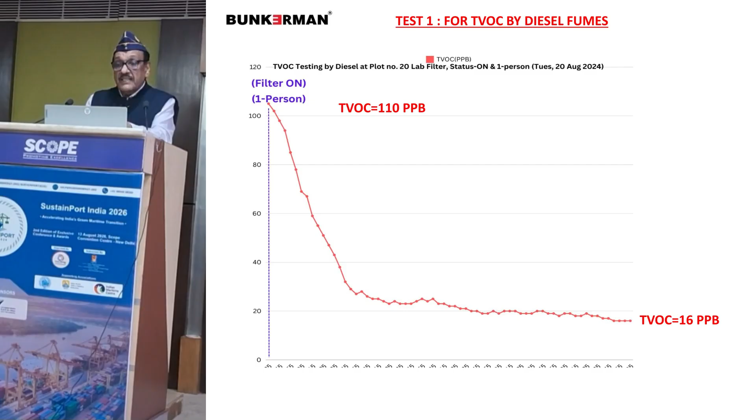वी हैव एब्जॉर्ब 100% वीओसी. हमने एक्सपेरिमेंट किए हैं, अपने फिल्टर डेवलप किए स्पेशली इनके लिए. बद्दी में हमारी फैक्ट्री है, लेबोरेटरी है, वहाँ पर ये टेस्ट किए हमने. यू कैन सी वीओसी इज इंक्रीजिंग फ्रॉम 24 to 110. जब हमने अपने फिल्टर यूज़ किए तो 110 से ये वापस 16 पे ले आई, ऑलमोस्ट जीरो. तो 100% एब्जॉर्प्शन, सिमिलरली हियर 100% एब्जॉर्प्शन. सो दिस प्रोजेक्ट इज बीइंग यूज्ड, जेंटलमैन, आफ्टर सीइंग सक्सेस इन गुवाहाटी रिफाइनरी. मैनी अदर रिफाइनरीज आर गोइंग फॉर दिस.

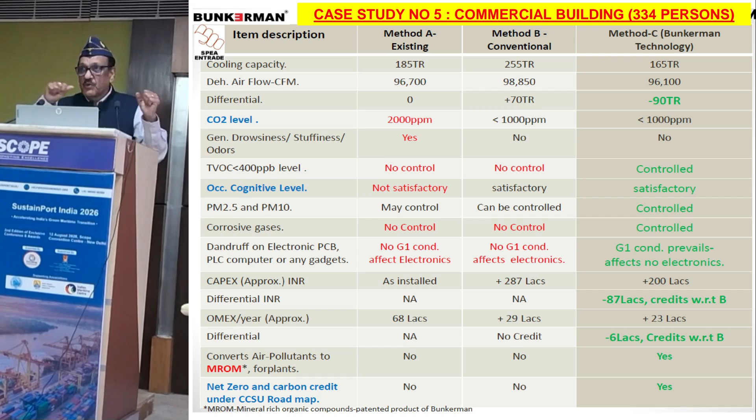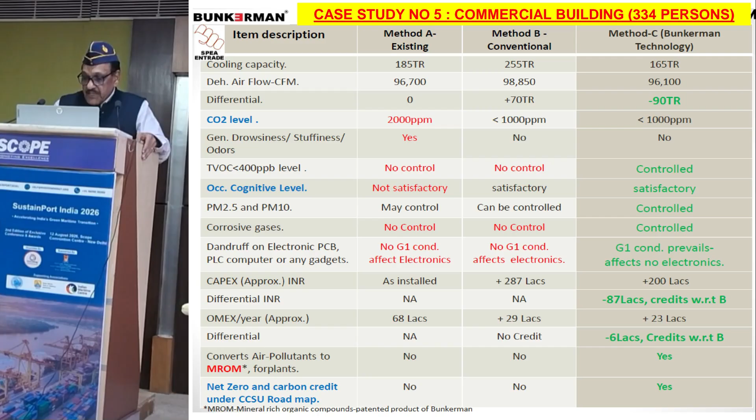Delhi government, gentlemen — you will be surprised to know, Delhi government is sanctioning 17,000 crore to enhance power in Delhi because they feel more power is required in Delhi.

With this technology, I have recommended to them that they use this technology only in air conditioned buildings, only in hospitals and 5-star hotels in Delhi. If they adopt this technology, they will save this much power — more than 7,000 crore per year of electricity can be saved in Delhi.

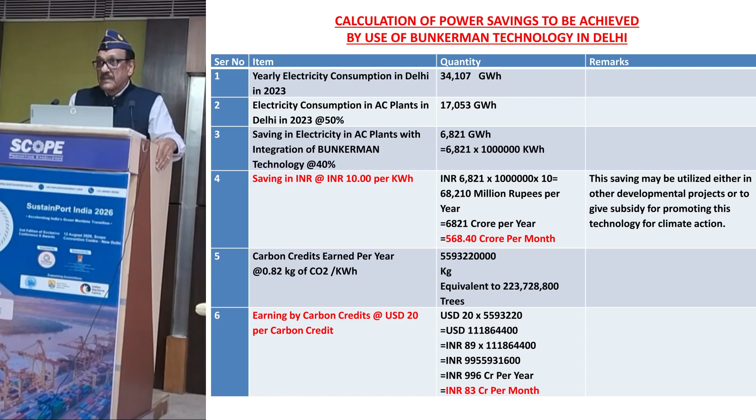In 3 years, 21,000 crore, and the 17,000 crore that they are spending — a saving worth 38,000 crore can be done in Delhi itself by this model, at no cost to the government. The government need not spend anything.

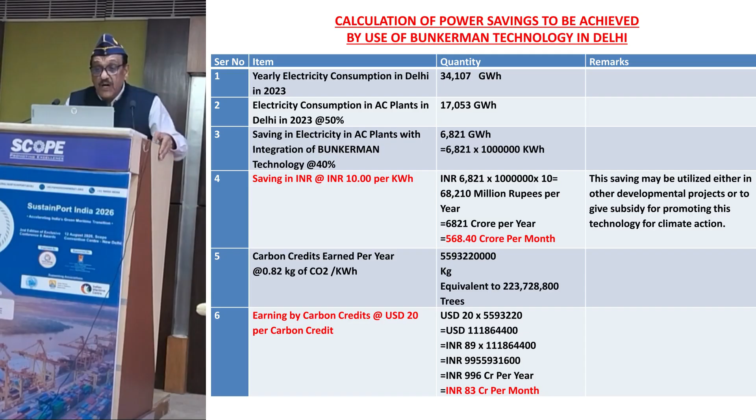In fact, they will earn about 1,000 crore per year through carbon credit, because this will be equivalent to — how many trees can you say — equivalent to 22.3 crore trees. I think this is more than 22 crore trees.

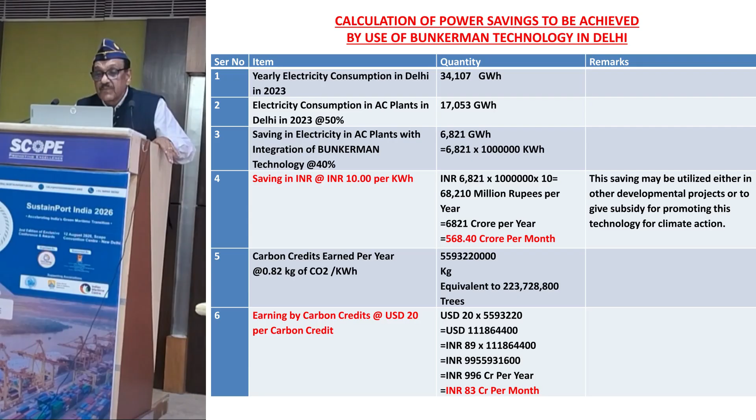Now coming to ports. Now gentlemen, there is a very prestigious project of Great Nicobar, you must be knowing. Some people have gone there and are saying havoc will be caused if this project happens. This is a very important strategic project for the country.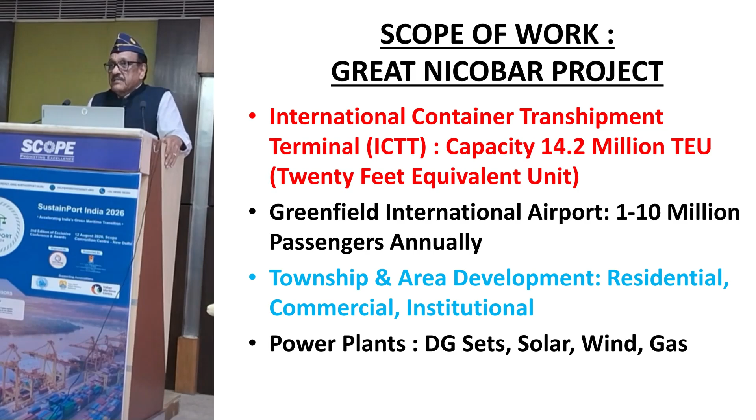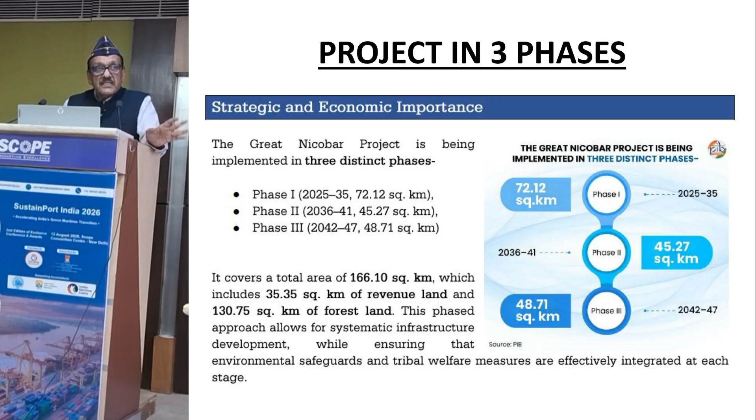Then township area development, 5-star hotels, residential — everything is coming. Hospitals are coming up there. Power plants are being planned because there is no power supply as on today. On DG sets, solar, wind and gas — everything is being used. This is projected in 3 phases, as you can see here — phase 1, phase 2, phase 3. In the next about 30 to 40 years, this project is to be completed.

I have taken the data of phase 1 only, gentlemen. In phase 1, total electricity which is planned here is this much, 450 MVA. Power plant is being planned. Now I have just taken a rough calculation.

If this is the air condition, out of total electricity consumption in any township, 50 to 70% load is air conditioning. So I am not taking 50 to 70%, I have taken only 50%. Let us say, assuming 50% load, this is the load of air conditioning. And if we are saving 40%, though my calculation is 40 to 60% saving in AC plant, just take 40% minimum saving, then you will be saving about 640 crore per year worth of electricity in this phase 1 of the project.

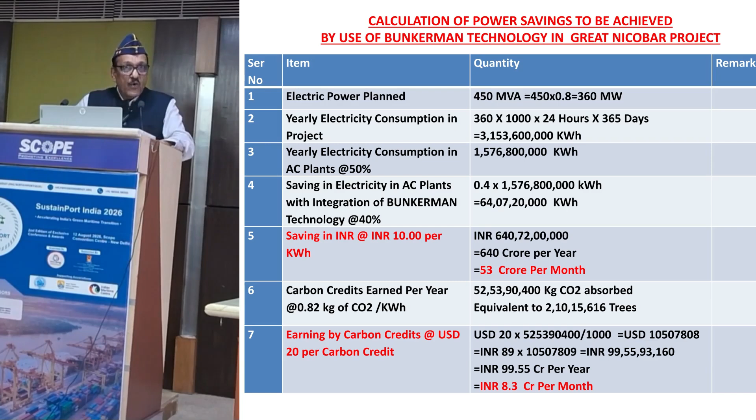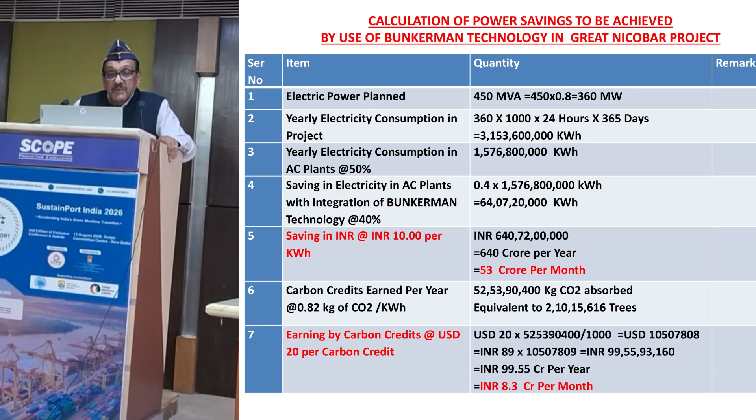Gentlemen, this proposal has been sent to ANIIDCO, to Niti Aayog, even to Gautam Adani. It is under consideration, hopefully this will be accepted. And they can earn carbon credit equivalent to this figure here, you can read, more than 2.1 crore trees, and it is about 100 crore per year will be the earning just by carbon credit. So this is a win-win situation.

Another thing is, I am giving a guarantee to them that since it is a new project, I need not ask any additional cost. I can give them a saving in capital cost of 10 to 15%, and then 40 to 50% saving in electricity every year. So this is a win-win situation.

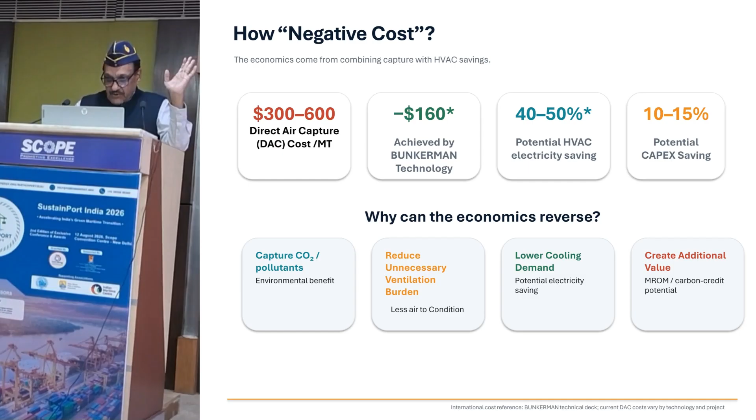And as you all know, this is a myth. Generally people feel that oxygen comes only from trees on earth. But the fact is only 20% of the oxygen in the environment is because of trees on earth. 80% comes from the oceans, from the ports, from the sea. This is the truth, 80% of oxygen in the environment is not because of trees on earth, it is because of marine life in the environment, the algae which grows underwater in the seas, all that life. So this is a fact.

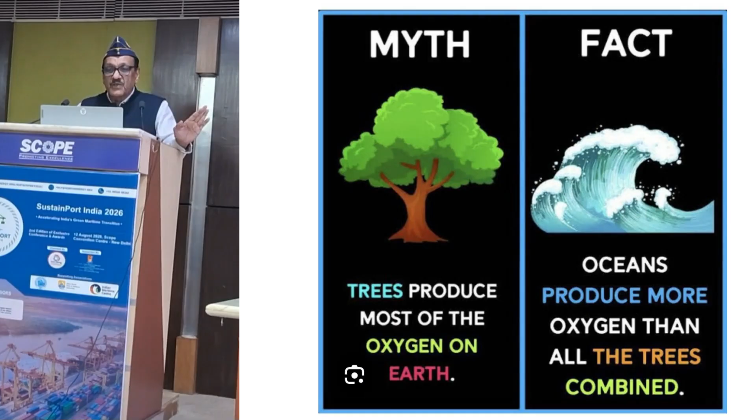So let us save our ports and use this technology in ports. The resultant saving, gentlemen, is 40 to 50% which I am talking about, only in chillers. Your chiller plant capacity gets reduced by 40%. And now imagine, if chiller plant capacity gets reduced by 40%, your AHU size gets reduced.

If AHU size gets reduced, your panels get reduced. Your standby DG requirement gets reduced. Your water consumption in cooling towers gets reduced. And even the space requirement gets reduced. So the saving is to the tune of 60 to 70%.

I am not emphasizing that because people get jittery, saying this cannot be possible, 60 to 70%. But I have shown you the calculations. I am only committing that even if it is 40 to 50% saving, it is a huge amount. Let us implement it, and the total saving in fact is much more than this.

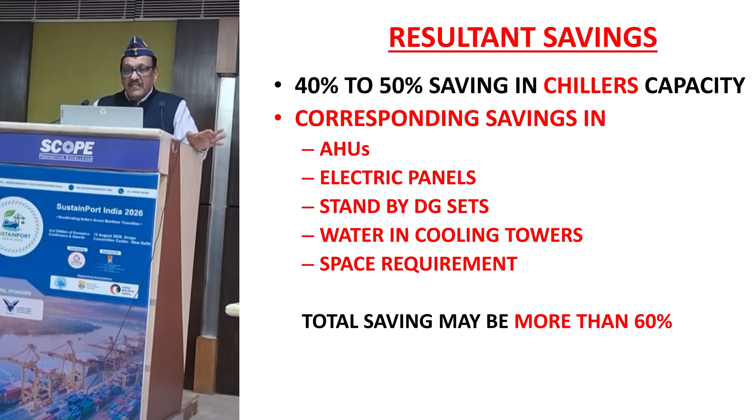Now this is how we are achieving negative cost. The direct carbon capture technology cost, gentlemen, in the international market is $300 to, even some people are claiming not $600, somewhere I find even $5,000 per metric ton is the direct carbon capture or direct air capture cost. So we have brought down this cost to minus $160 in India, gentlemen.

Calculations are there, practically it is happening, you can come and see it. And it is 40 to 50% saving and 10 to 15% saving.

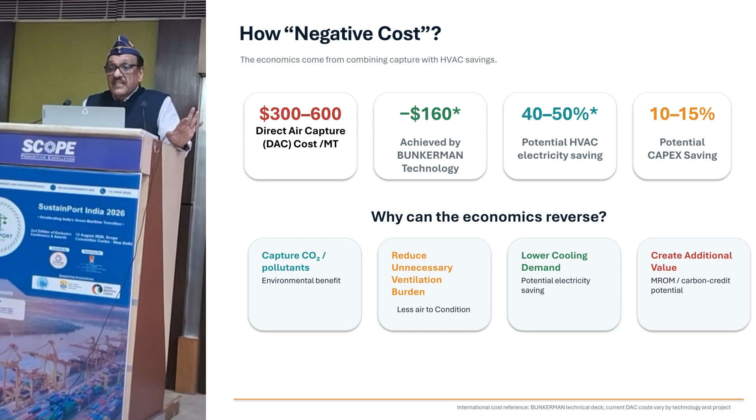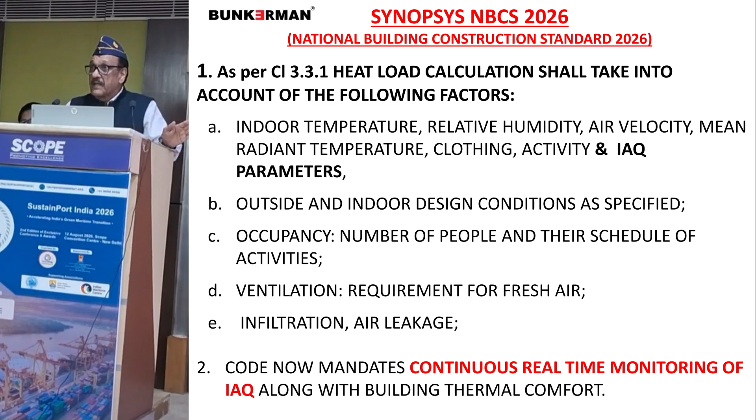Gentlemen, good news is that this NBC 2026 has been issued recently. Earlier our National Building Code was NBC 2016, that has now been revised, and in this revision all these provisions have been made. We have to measure outside CO2, inside CO2, all these gases have been made mandatory, and therefore consultants have to submit calculations based on this. So now hopefully this solution will be possible.

Now other than this, we are having these individual units also. Just quickly see the images. And this is all measurable.

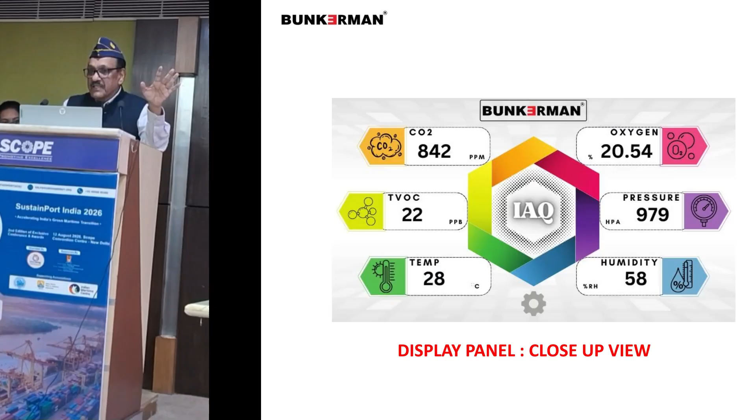This system is recording, instrumentation is being done for how much CO2 is being absorbed, it is on record. So it is easier to get the carbon credits because of this. These are some systems, even for outdoor, and on the roads you can have systems like this.